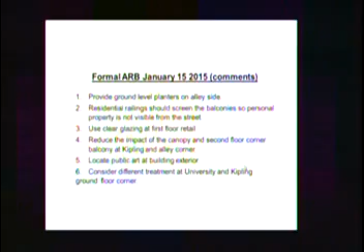So when we were here in January, we generally had your support with the modifications that had been made relative to mass, scale, setback, and more importantly, rhythm to the facade. I think the material palette had been endorsed at the prior hearing.

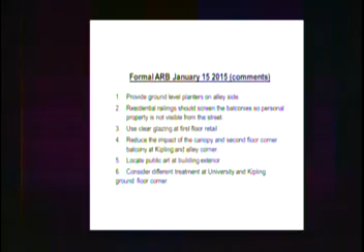But you had some details you wanted us to come back on: provide ground level planters on the alley side of the project, address the residential railings due to concern about seeing personal property on balconies, and make sure clear glazing is used at the ground floor to address Board Member Liu's concern. The drawings say that.

Also on the Kipling side, there was discussion about reducing the impact of the canopy that provided shelter at the elevator and stair enclosure, and maybe reducing the cantilever of the balcony at the second floor corner. We had public art in the lobby prior, and the Art Commission expressed some concern, so we have a new proposed location. There was also discussion about a different treatment at the University Avenue and Kipling corner on the ground floor.

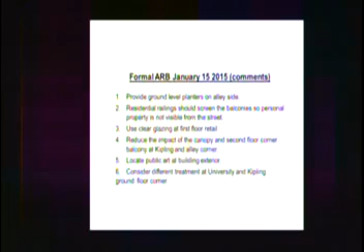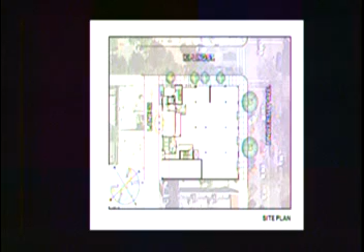The first slide shows the changes on the alley. We've introduced 3 handmade clay pots, about 31-32 inches tall, 18 inches rectangular, planted with horsetail. They're beautiful pots that match the ones on the 4th floor balcony, and the horsetail matches the planting in the built-in planter located on the corner.

On the University Avenue facade—shown in both of these images, or all 4 of the next slides, the top image being the last one you saw—the changes are frosted glass laminated railing at the 3rd floor apartments to hide personal property, clear glass on the ground floor, and reconfiguration of the unit on the 4th floor, bringing the living area to the front. That resulted in some changes, including added windows you didn't see before.

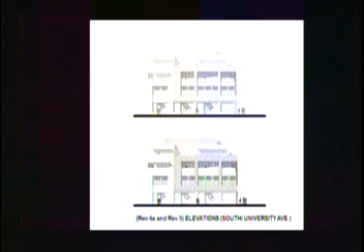And then on the corner, we really felt strongly about keeping a corner window, and I think we had the support of some members on that concept. It's consistent with one of the prescribed ways to address a corner, and our owner's program from the very beginning was a corner window, so we feel pretty strongly about keeping that.

On the Kipling side, again, the corner window is as it was before. We have translucent glass on both residential balconies, clear glass on the ground floor. The biggest change has to do with this corner here.

We've pulled it in about 1.5 feet, pushed it in towards the building so it doesn't hang out to the alley. The property line is right here, so we're about 4 feet back from the edge of the property line, I believe.

And then the canopy here for the elevator—you can't tell in this drawing, but we've pushed it back 5 feet. So instead of 10 feet, it's approximately 5 feet deep from the elevator door. And then you see the planter here that was there prior.

For the artwork, we're thinking of engaging the artist to do something on the stairwell—there was some suggestion about that as well. We don't know what yet, but that's what we're going to target. I think that'll provide interest on a blank wall and also help with some of the scale and texture of that piece.

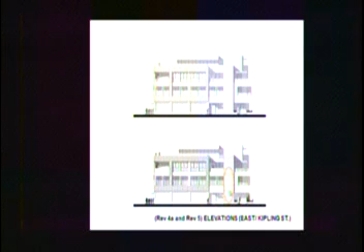On the alley, you see the change where this canopy was pushed back 5 feet. You don't really notice the change here, although we did change the texture of the reveal pattern, getting it a little more refined, which reduces and makes a smaller scale on the reveal pattern.

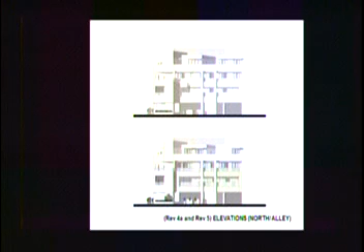You see the planters here, and then we have a ficus vine that's actually going to grow on the concrete wall located there. And then on the 4th floor, there's some of those changes I talked about where we've just done some reconfiguring of the units, which has shifted some of the windows around, like these windows are different here. But other than that, no change.

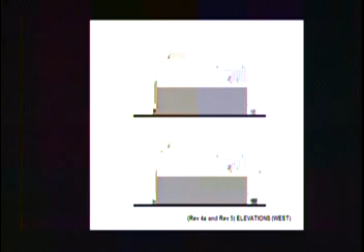And then the only change on the side is the translucent glass. This is prior. And so now this piece of glass here is translucent, so that wraps that corner of that 3rd floor unit.

And then the integration with the streetscape, you see the 1-story buildings coming along, it steps up to this piece, and then it steps up again to this piece. And as you all know, this is set back about 15 feet, so it will read like a nice transition to the rest of the block.

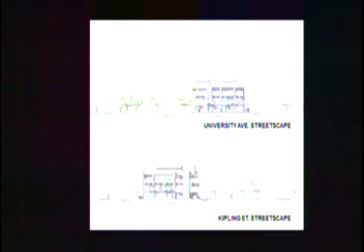And then on the Kipling side, you can see where we've pushed this back as well there, and then the artwork will be on that corner to help with this transition. This is the prior. We thought it'd be good just to see them next to each other. So you see the glass here and there, and then how this has been pushed back, and that's where the artwork would go.

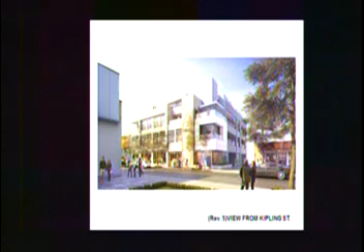And then on University Avenue, oh, you can see the planters down the alley as well. University Avenue, before and after. Now, I think it'll read more translucent than this. I don't want it to look like the Neo-Paris, which will increase the mass. So we want it to be translucent enough to be differentiated, yet solid enough to hide what's behind it, and I think it will. And that's it.

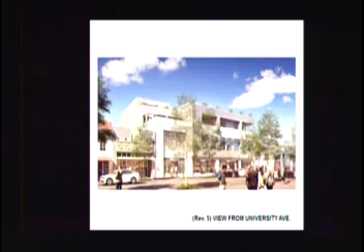I'm having a little trouble understanding where the frosted glass is versus the not frosted glass, and I want to make sure it's on all of the residential balconies. It looked to me like it wasn't on Kipling. Is that all residential balconies that face the two public street frontages? And this side here, Chair Popp, right here. Okay, on the alley, on University and Kipling, it's some type of translucent but not transparent glass, and then what you would see on this angle here. It's not quite clear from your drawings, and the translucency sort of stops mid-panel even on one of the drawings. So we just want to make sure that's well coordinated and clarified, and I'm going to ask you to provide a sample of that glass to subcommittee for us.

I appreciate the finer grain that you've developed for the building and the character that you've changed and how you've relooked at that.

I'm jumping around here a little bit. The unit design itself, as Mr. Lew and others have described, it's great to have housing downtown. I'd love to have seen smaller units. You certainly have the parking to accommodate that. It would have been great to get that, because I think that's most desirable for the millennial generation, which are likely to be using this.